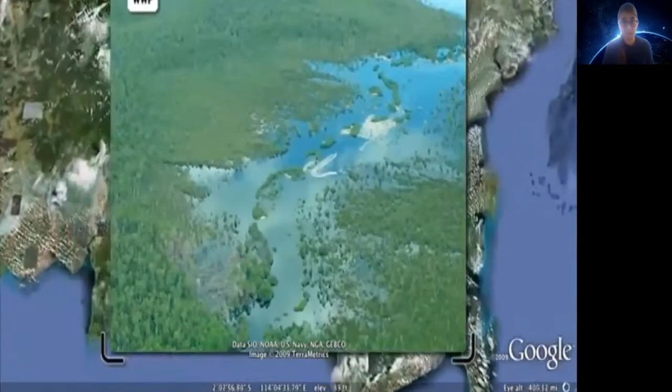Borneo, the third largest island on our planet, is home to the oldest forests and richest biodiversity worldwide. Among them is a unique treasure, the Peat Swamp Forest. For a long time neglected, we know today that these forests are one of the largest terrestrial carbon reservoirs.

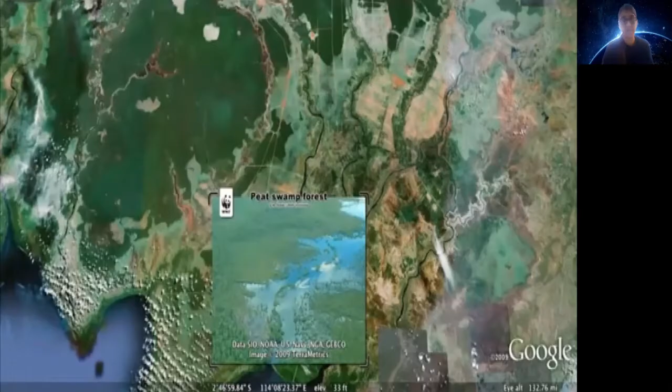So, now let's see what is peat soil. Peat soil is formed when organic materials such as plants begin to decompose, but the presence of too much water halts this decaying process. This partially decomposed material collects as peat soil.

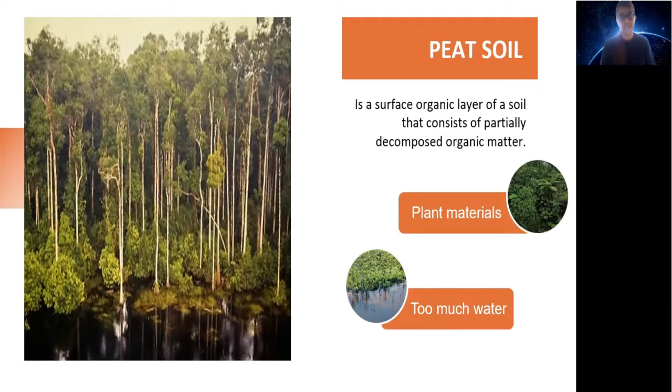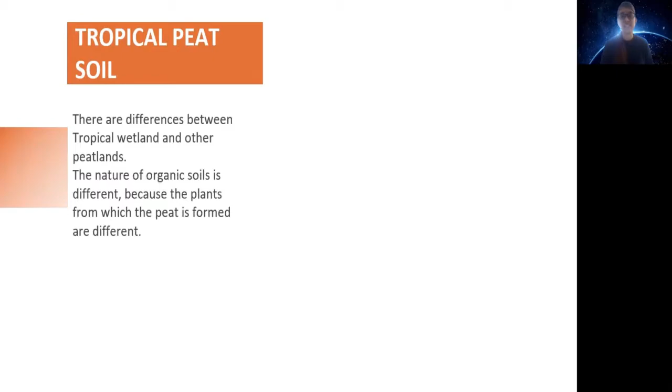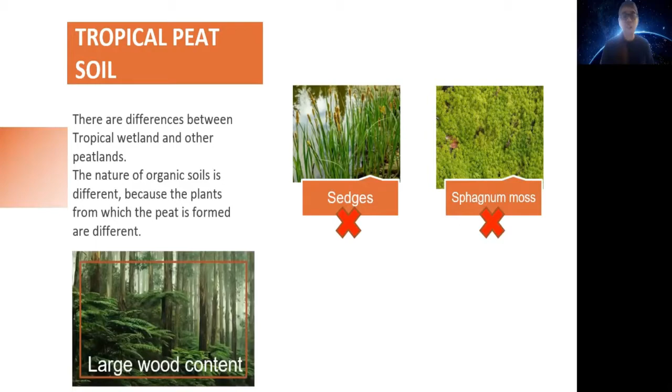Now we are going to see why tropical peat soils are different from other peat soils. There are differences between tropical peat and other peatlands. The nature of the organic soil is different because the plants from which the peat formed are different. In the tropics, trees are frequently involved as opposed to sedges and sphagnum moss in temperate regions. The large wood content of tropical organic soil requires special management.

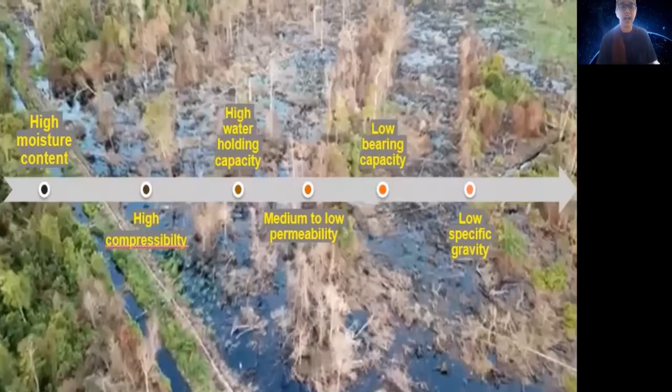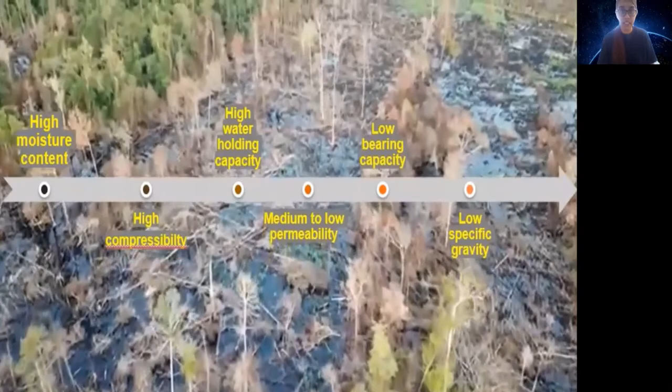So now let us understand more about the properties of tropical peat soil. Tropical peat soil has high moisture content, high compressibility, high water holding capacity, medium to low permeability, low bearing capacity, and low specific gravity.

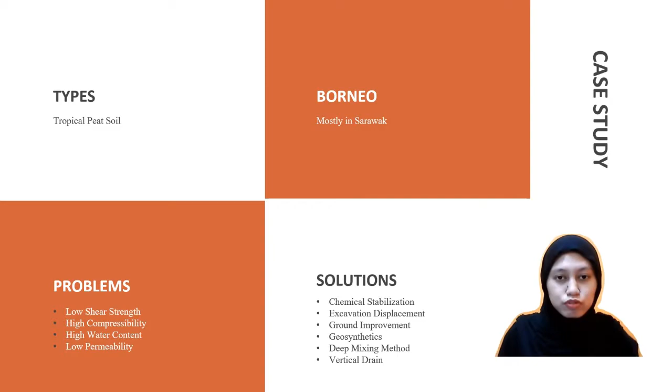There are a variety of problems for peat soil, such as low shear strength, high compressibility, high water content, and low permeability. There are many options that can be used to address this issue, including chemical stabilization, excavation displacement, ground improvement, geosynthetic, deep mixing method, and vertical drain.

Hello, my name is Narshazani and I will continue with the problem of tropical peat soil. Tropical peat soil has typical properties such as high compressibility. The compressibility of soil refers to the property of soil that causes a decrease in volume when subjected to compressive force. When a load is applied to the highly compressible soil, the volume changes. This results in settlement.

Next is low shear strength. Low shear strength is the problem in design and construction on tropical peat soil. Most failure patterns in geotechnical and foundation engineering are based on development of shear stress in the soil mass as a result of induced loading or unloading caused by the construction process. Failure occurs when the induced shear stress exceeds the underneath soil shear strength.

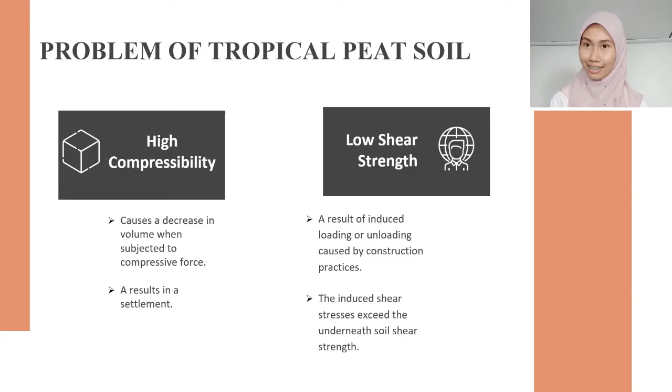Another problem is low permeability. Structures constructed on peat are often affected by stability and low permeability. The amount, distribution, and movement of water in soil are referred to as permeability. It has a significant impact on the properties and behavior of soil. The permeability of soil also has a significant impact on foundation stability.

Last but not least is high water content. Peat is well known for its high water content. Water content or moisture content is defined as the quantity of water that exists in the soil mass. Moisture content is an important indicator of field constructability. When the soil moisture content is high, the construction activity becomes difficult. Excessive soil moisture during a construction project causes change orders, which raise the construction cost and cause unexpected delays.

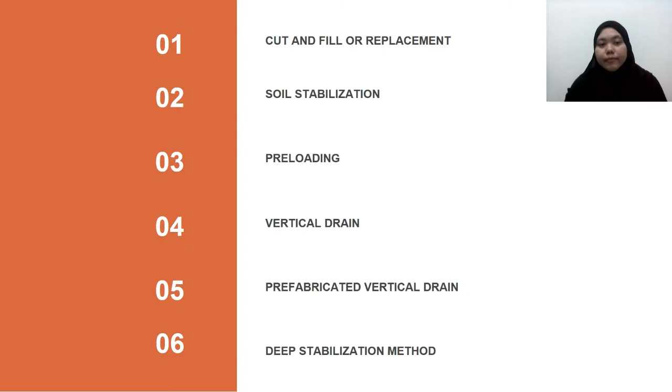Methods to overcome the peat soil problem. There are various solutions proposed by previous researchers to resolve the peat soil problem, which are cut and fill or replacement, soil stabilization, preloading, vertical drain, prefabricated vertical drain, and deep stabilization method.

The first method is cut and fill or replacement. This method is one of the oldest or conventional methods, replacing the poor soil with suitable imported fill materials. But this method is very expensive. This method also has been categorized as accelerating consolidation, ground improvement techniques to reduce deformations, load modification, and stabilization methods on soil.

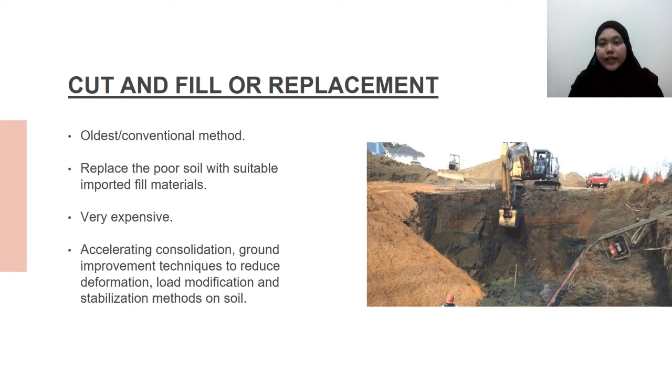The second method is soil stabilization. Soil stabilization became popular about 40 years ago and has been widely used in the last 20 to 25 years as an alternative way to deal with peat or other soft soil. Originally, lime was the only binder used, but in the mid-1980s, cement became a popular method with considerably higher strength achieved. Moreover, comprehensive trials and fieldwork have been carried out, where cement with different industrial binders has been shown to improve the mechanical properties of soil on shear strength and compressibility.

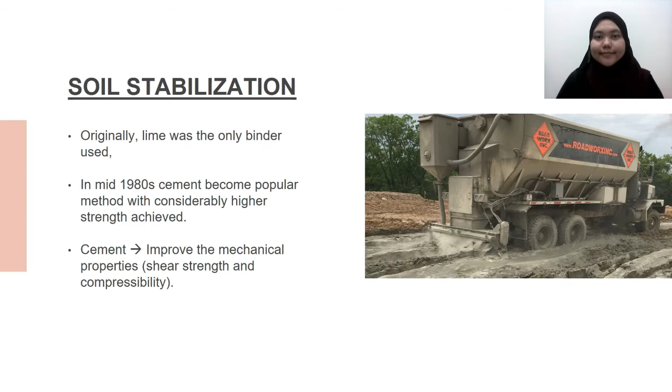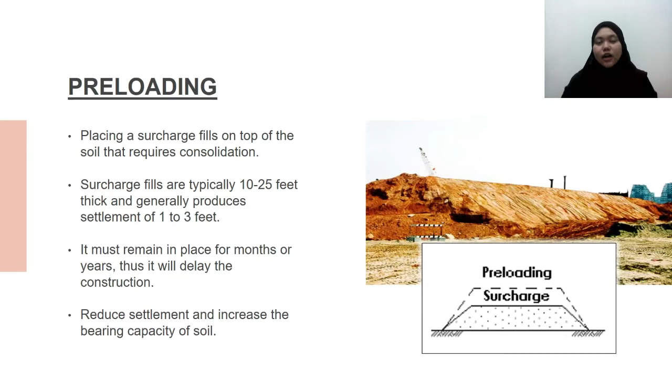The third method is preloading. This method involves placing a surcharge fill on top of the soil that requires consolidation. Surcharge fills are typically around 10 to 25 feet thick and generally produce settlement of 1 to 3 feet. It must remain in place for a month or a year, thus it will delay the construction. Preloading is an economical and effective soil improvement method that can reduce settlements and increase the bearing capacity of peat or other soft soil.

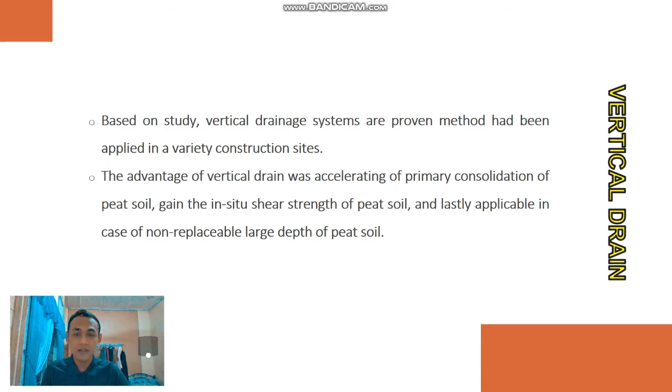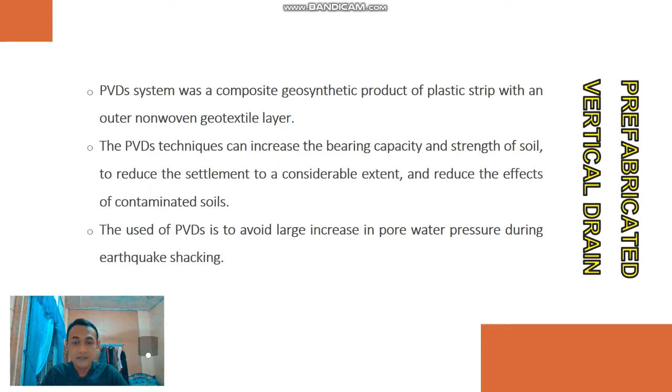And then we go to the prefabricated vertical drain. The PVD system is a composite geosynthetic product of a plastic strip with an outer non-woven geotextile layer. PVD techniques can increase the bearing capacity and strength of soil, reduce the settlement to a considerable extent, and reduce the effects of contaminated soils. PVDs are also used to avoid large increases in water pressure during earthquake shaking.

And then the deep stabilization method. Soil stabilization improvement involves mixing with chemical stabilizers such as lime and cement. Lime addition in the stabilization method reduces the optimum water content and increases the maximum dry unit weight or dry density of peat soil. Cement addition results in good compressive strength and can decrease the soil liquid limit.

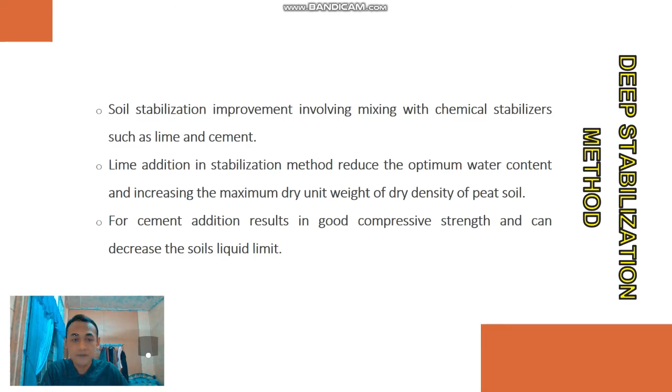In this video, I want to present the conclusion. Peat swamp forests are a very unique ecosystem. The lowland peat areas in Malaysia are often flooded and swampy. Most of the peatland was designated as swampland. In some parts of Malaysia, especially Sarawak, there are few options for what form of land to use, since peat covers a large portion of the state's landmass.

Peat soil is often described as a problematic soil for civil engineering and geotechnical works due to high compressibility, low shear strength, and low permeability. As a result of the load caused by the structure, bearing capacity failures and deformation can occur.

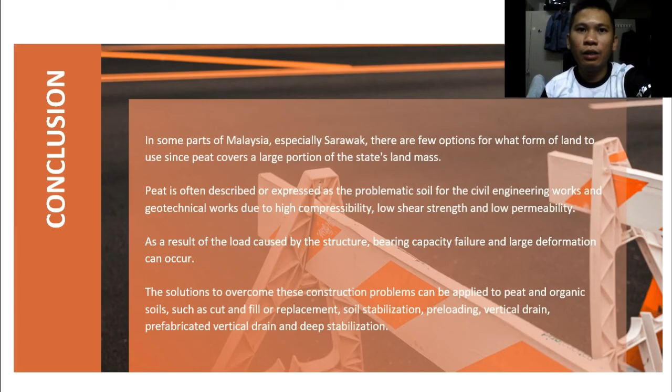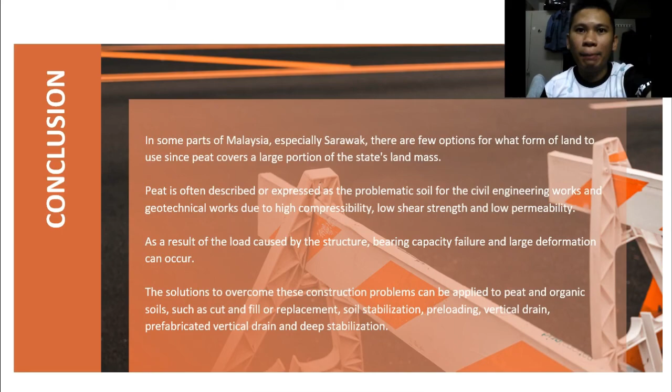Solutions to overcome this construction problem that can be applied to peat and organic soil include cut and fill or replacement, soil stabilization, preloading, vertical drains, prefabricated vertical drains, and deep stabilization. However, future work in terms of legislation and analysis is needed before building on peat can be completely implemented while eliminating the settlement.